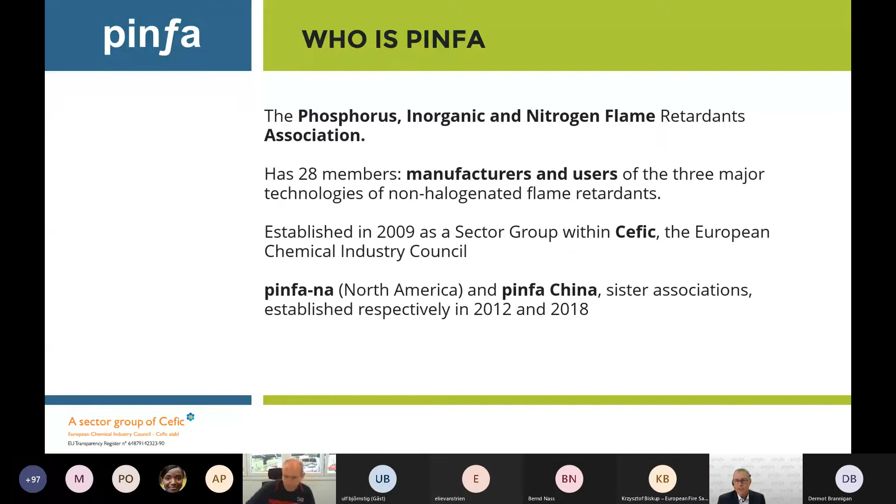Going to the next page, who is PINFA? As I said, the Phosphorus, Inorganic and Nitrogen Flame Retardants Association was established in 2009 as a sector group of CEFIC, the European Chemical Industry Council. And we also have sister associations in North America and China set up in the meantime. And on the next page, just a quick snapshot of our membership. So you'll see big familiar names from the chemical industry, but also smaller specialized companies. And PINFA brings together not only producers of flame retardants, but also downstream users of flame retardants, because we want to collaborate along the value chain.

Going to the next slide, just also a quick view on our leadership team within PINFA. So there is Esther and Hanan, based at Cefic in Brussels, who take care of our daily operations. And I have two vice chairmen, Michael Klimes and Thomas Futterer.

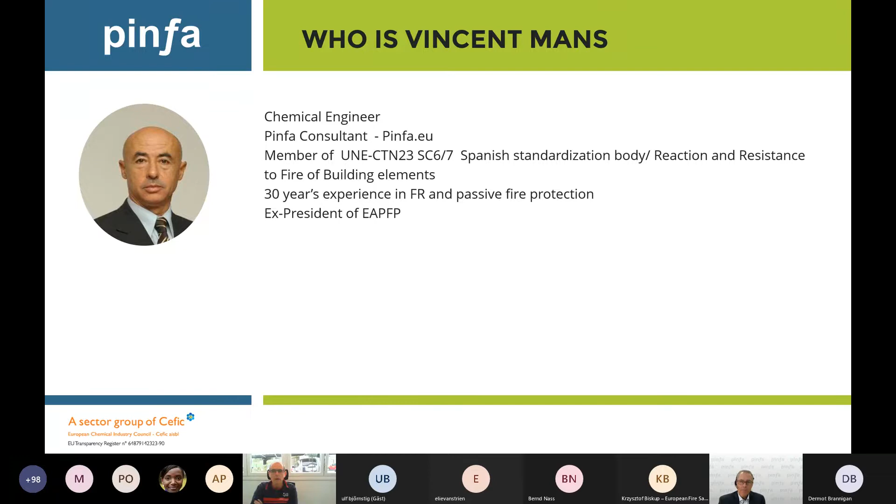And then we have Laurent Tribu, a polymer expert who works at Schneider, but has also a history working for other companies like Nexans, experience in wire and cables, a lot of experience in flame retardant formulations, also work in standardization bodies like IEC, and he's also a member of our pinfa advisory board. And then further, Dieter Brands, a colleague from the fire services. He graduated from the University of Leuven and now works with the fire brigade and is very active in fire safety activities in Belgium. And he will be speaking later to us from the fire station. So looking very much forward to that.

And then we have Lars Derek Mellet from Switzerland joining us. He works for a consulting company, Walter Progress AG, and is an expert in tunnel fire safety. So applied research projects on road tunnel safety and operational safety equipment in these tunnels, and we'll hear from him later on the specific issues that these tunnels pose for safety involving electric vehicles. Yes, with that we come to the first presentation, and that will be Paul, and he'll speak about fire risks of road vehicles and how these risks are changing with vehicle safety.

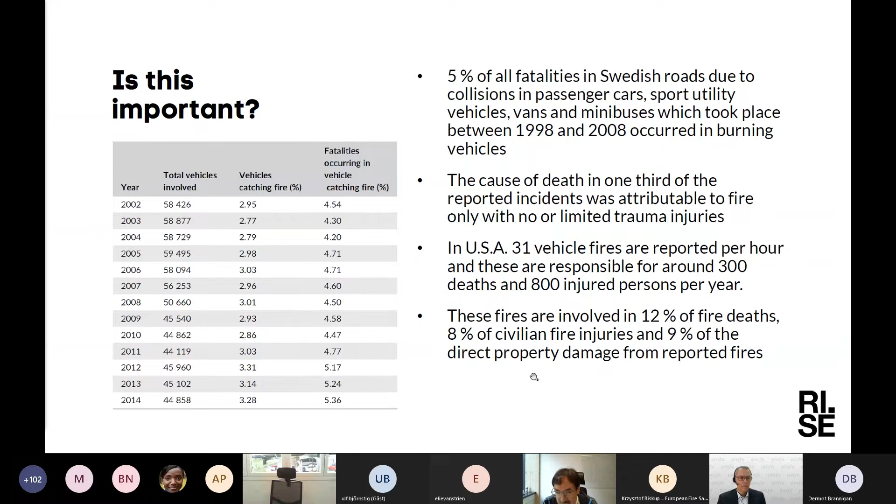On the other hand, if we consider the third column, the vehicles catching fire increased from 2.95% to 3.28%. Well, it's just 0.5%, right? It doesn't seem to be a lot. But if we consider the casualties in traffic and take the last column, we see that fatalities occurring in vehicles catching fire go from 4.54% to 5.36% in this 12-year period. That means the amount of persons who die due to fire is increasing. So if you please take the next slide.

Then if we take a look at the primary factor involved in ignition and fire rate, according to the age of vehicles, we see that modern vehicles have a slight increase in catching fire, at least going to 2014. That means not all the vehicles, but the modern vehicles have a slight increase from 2.5% to 3.5%. If we talk about the primary factor involved in ignition,

Oh, there is some microphone here. But yeah. Can everybody please mute? I'm gonna mute all, and Paul, if you can unmute yourself to take care of this issue. Okay, I'm gonna hit mute all. Okay, so Paul, if you can unmute yourself now, then we can continue.

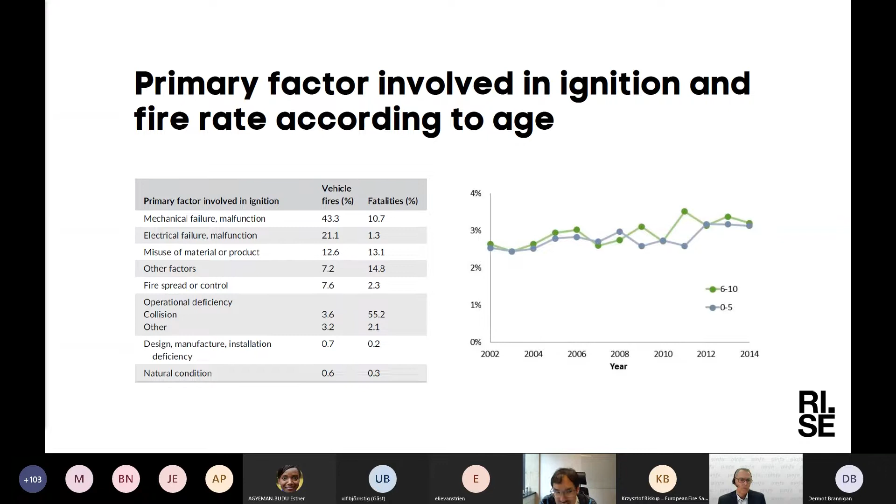I'm talking just about fires in vehicles due to a collision in this part, and we're now showing the initial point of impact and origin of minor and major fire. There is a chart on your left-hand side which shows that the most representative, overrepresented type of collision is a frontal collision.

And on the right-hand side, there is a chart which shows the occurrence and origin, and the two right columns are unweighted and weighted. Because we take the statistics, and when we weight them, that means how many fires they correspond to in statistics for the United States. And we see that most of the fires indeed commence in the engine compartment as a minor occurrence. As a major occurrence, it's the same. And you continue to the next one, please.

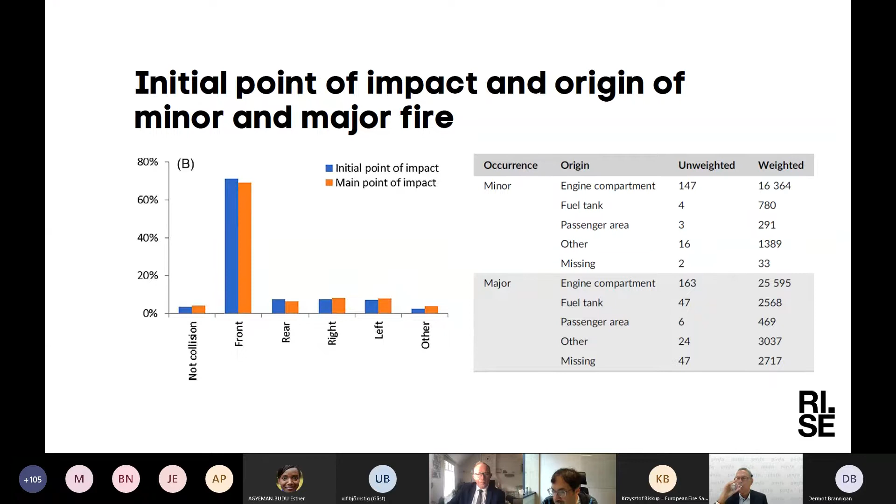And then we take the area of origin and cause of fire, and that's probably the most important part: how you translate the statistics I just showed you. The engine area, the running gear, and the wheel area are probably the most important for major vehicle incidents in transport. But we also consider fatalities, in red or orange, whichever color you see. It's also overrepresented: almost 80% of major vehicle incidents commence in the engine area, and almost 40% of the fatalities occur due to fires that originate in the engine area.

If we look at the right-hand side chart, which is similar but about the cause of fire, the cause is operational deficiency or collision. That's where most of the fatalities are, but not most of the fires. That means operational deficiency or collision leads to the major amount of fatalities, even though it's not overrepresented, because mechanical failure and malfunction is the one behind most major vehicle incident fires. But for fatalities, collision is the one that leads to the most deaths attributable to fire. Could you show the next, please?

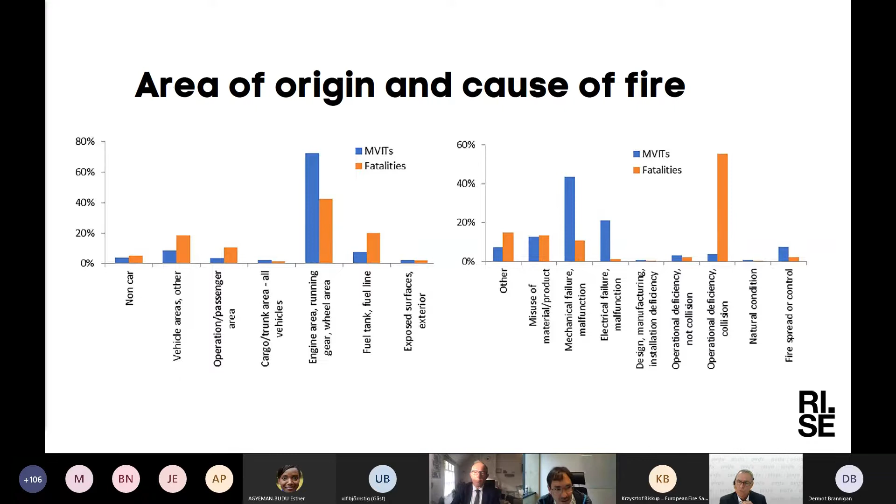If we consider the amount of energy dissipated in each crash, and the fatalities that result, it's not surprising that increasing the energy of a collision will lead to a higher probability of catching a fire.

When we arrive at more than 2,000 kilojoules, that's a massive amount of energy dissipating in a crash. Most crashes, about 3%, are in this region, about 2 megajoules. But when we arrive at 4 megajoules, the probability of catching a fire and dying in a collision is massive.

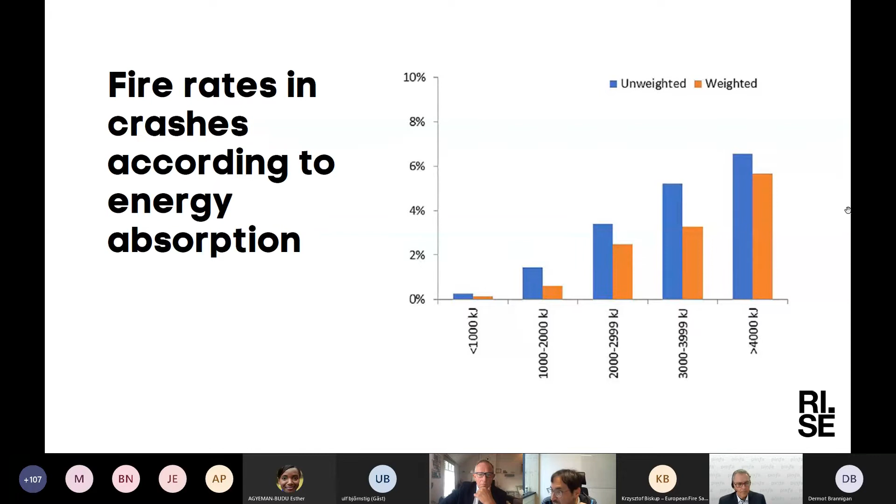The sad part is that we have improved the survivability of crashing in vehicles a lot, but the probability of catching a fire is larger. That means we have a better probability of surviving a crash due to traumatic injuries, but a lower probability of surviving due to the vehicle catching fire.

Next one, please. What happens when we compare, without a crash comparison, internal combustion engines with electrical vehicles? We did some measurements and some studies in the literature.

On the left side there is a chart measuring carbon dioxide, carbon monoxide, hydrocarbons, nitrogen monoxide, nitrogen dioxide, hydrofluoric acid, and cyanides. We compare just the amount for electrical vehicles and internal combustion engines.

We see that, above all, hydrogen fluoride and chloride production is much higher for electrical vehicles than for internal combustion engine vehicles. This is, of course, not surprising since we have been expecting it.

Then there is a chart comparing the energy of the battery against the hydrogen fluoride that is produced. As you can see, the larger the battery, the larger the amount of hydrogen fluoride produced.

There are tests being produced in ETOX, which is our project from RISE, and also from INERIS, on vehicle tests on the battery, which is a larger scale test. Now my last slide, if you would like further information.

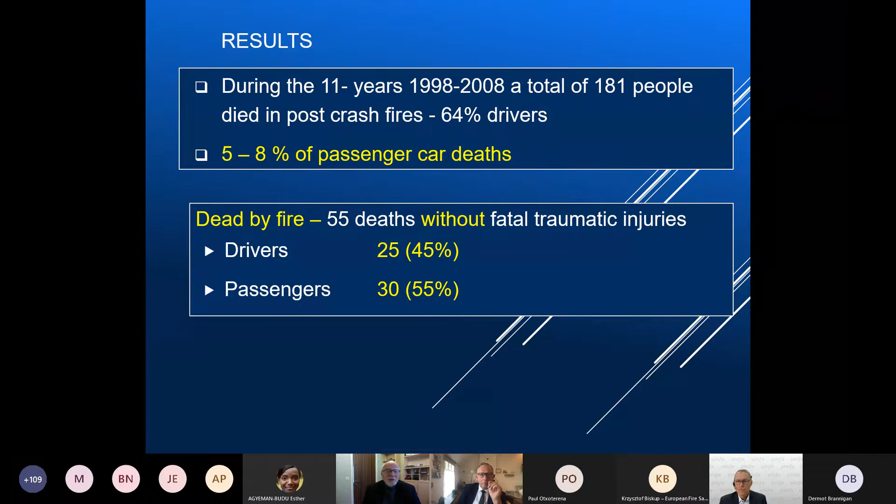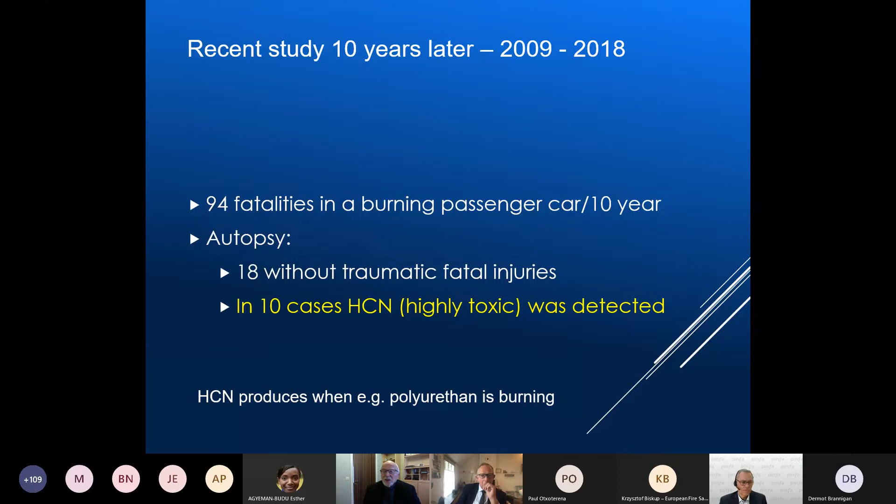Next slide. We have recently repeated this study. It's interesting that forensic pathologists have identified hydrogen cyanide in at least 10 victims of the 18 who died because of the fire. I will talk more about this substance later.

Next, please. Does e-vehicles cause new problems with respect to gas emissions? Paul pointed out one substance. Maybe it will be so. We'll wait and see.

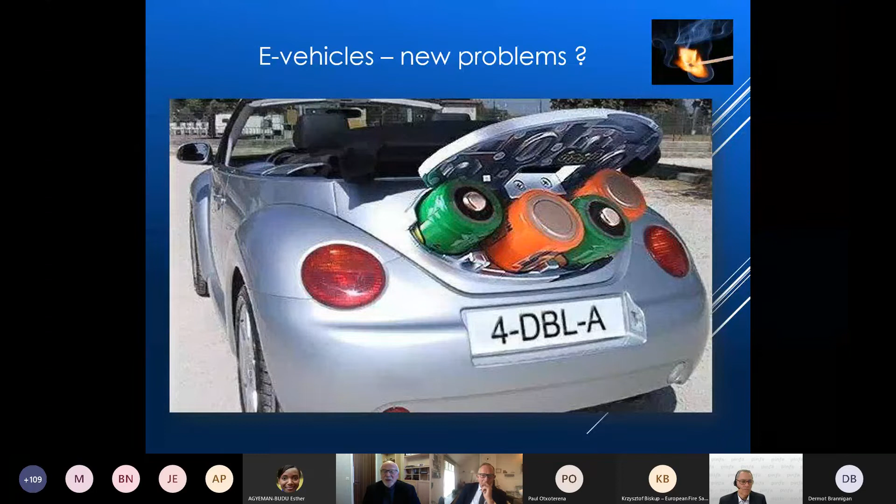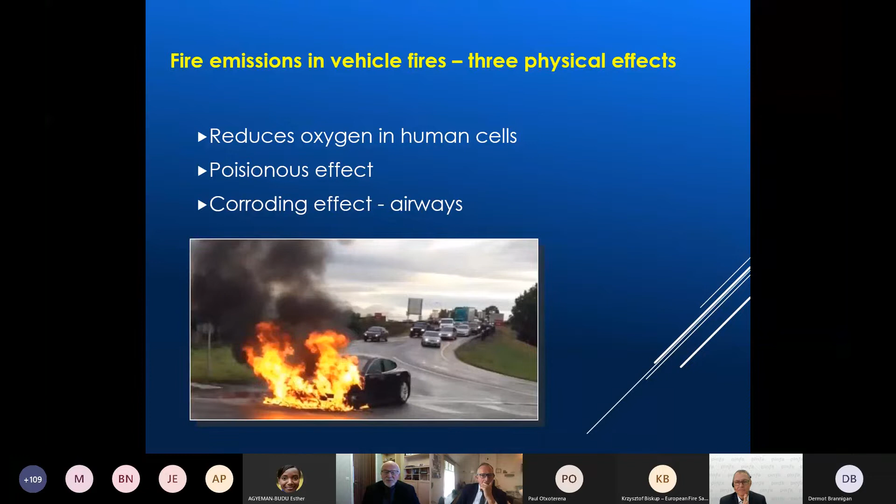Next picture, yeah. The smoke may have three main effects, as you see on this slide. Next slide.

First, we have the oxygenation problem. Three factors that are additive and contribute to compromising the oxygenation of cells are: first, lack of oxygen in the air. If the level is below 10%, it is too low. This may happen in a closed space, for example in a ferry or an underground garage, when the fire has consumed the oxygen from the air.

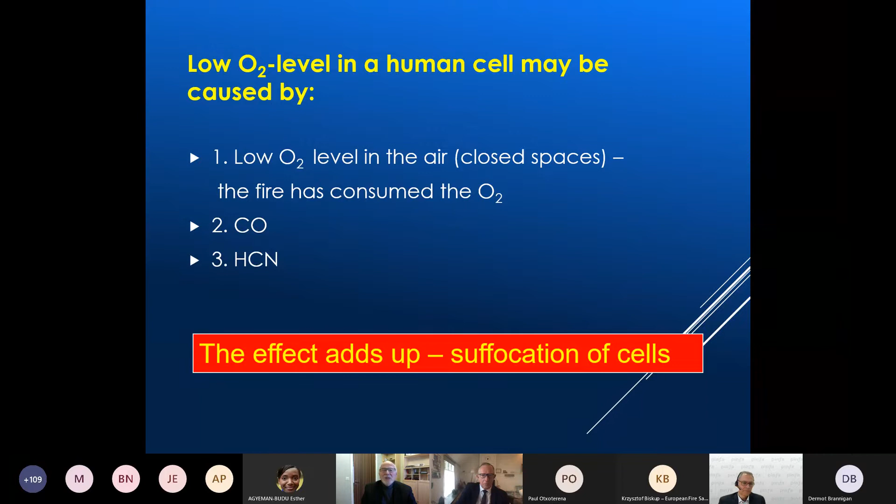The second factor is carbon monoxide, and the third is hydrogen cyanide, both with very important effects, but possible to handle. Carbon monoxide attaches 250 times easier than oxygen to the hemoglobin in red blood cells, thus blocking the uptake of oxygen. High levels of carbon monoxide cause death, but quick and competent treatment may save some victims.

A pitfall is the fresh red color of carbon monoxide hemoglobin in intoxicated victims, which could be misinterpreted.

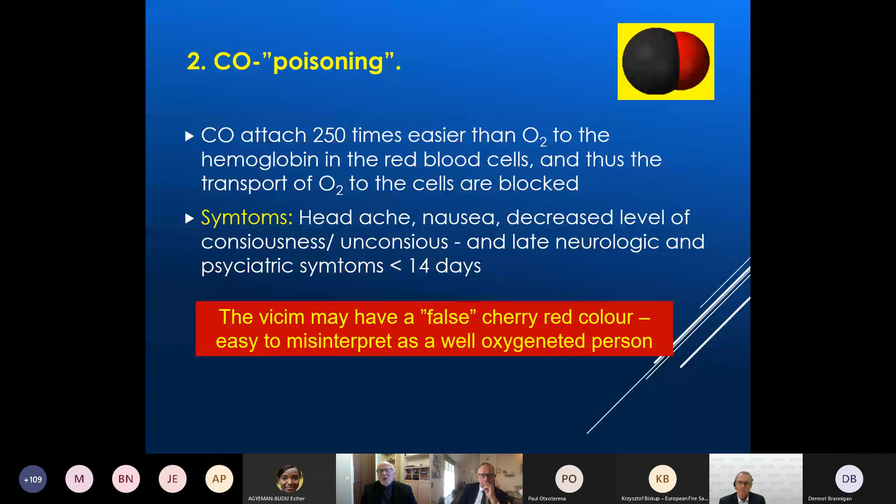The third oxygen-compromising factor is cyanide, which is a highly toxic gas causing death quickly in low concentrations. The cyanide ion goes easily from the bloodstream into the cell, and in the cell it shuts off the energy production. Consequently, the cell cannot absorb any oxygen from the bloodstream.

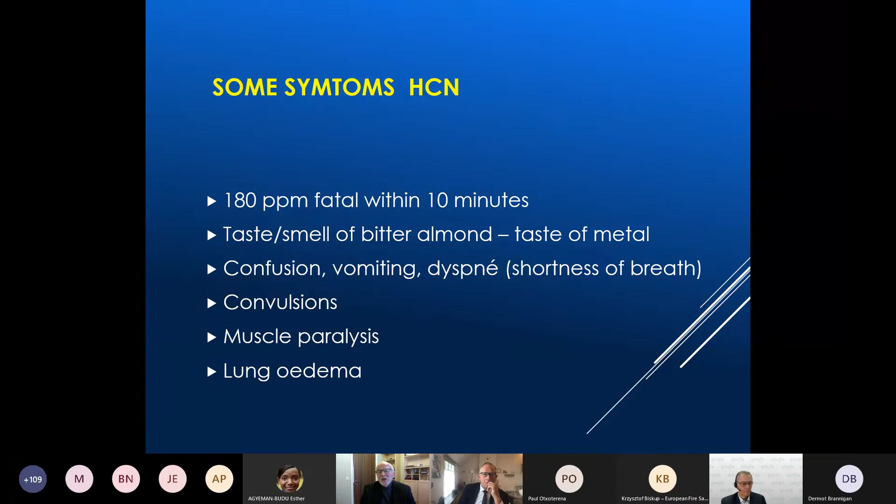Cyanide smells of bitter almond, causes confusion, convulsions, and finally death.

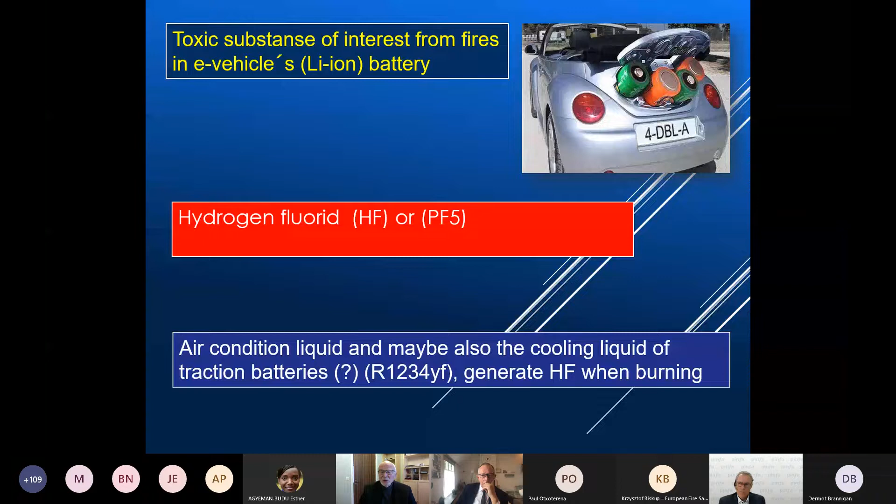Does a vehicle add more to these problems? Yes, maybe. A burning traction battery often produces hydrogen fluoride, HF. However, HF may also be produced by, for example, air-conditioning liquid burning in other cars. I don't know, but a recent rumor indicates that eventually the same liquid may be used in e-vehicles' traction battery cooling system. I do not know, but if this is true, it would be bad.

HF has two major physical effects. The first is a corrosive effect causing swelling and bleeding in the airways that may cause severe respiration problems.

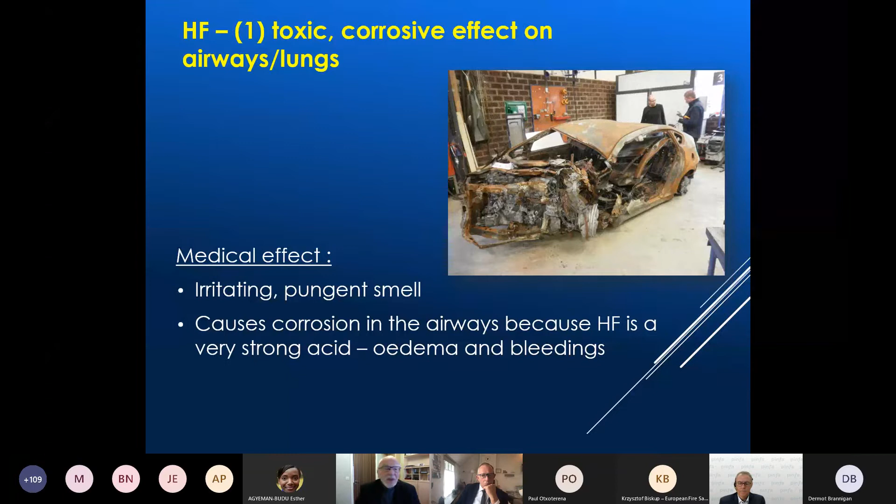The second effect is changes in the electrolyte balance in blood, of which a low calcium level may cause heart arrhythmias, and a high potassium level will cause severe muscular pain.

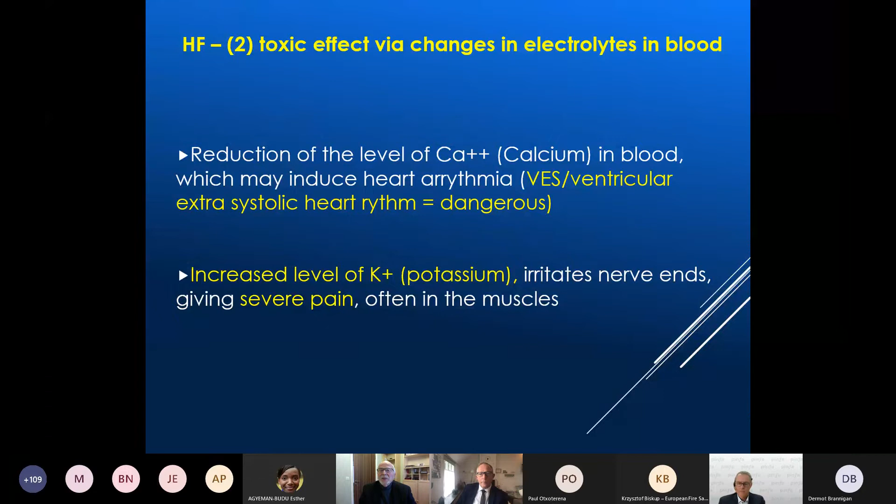So how to treat the victim? First, always oxygen, preferably 100% under overpressure if possible. Second, if edema and swelling in the airways, put an endotracheal tube into the upper airway to secure breathing. Third, asthma drugs against bronchus narrowing, plus cortisone drug against swelling.

The fourth point is, if the victim has impaired consciousness, give an antidote against cyanide, in this case Cyanokit, a fantastic safe drug, reversing the block of energy-producing mitochondria in the cell. However, the drug is a little expensive, so not all ambulance organizations use it.

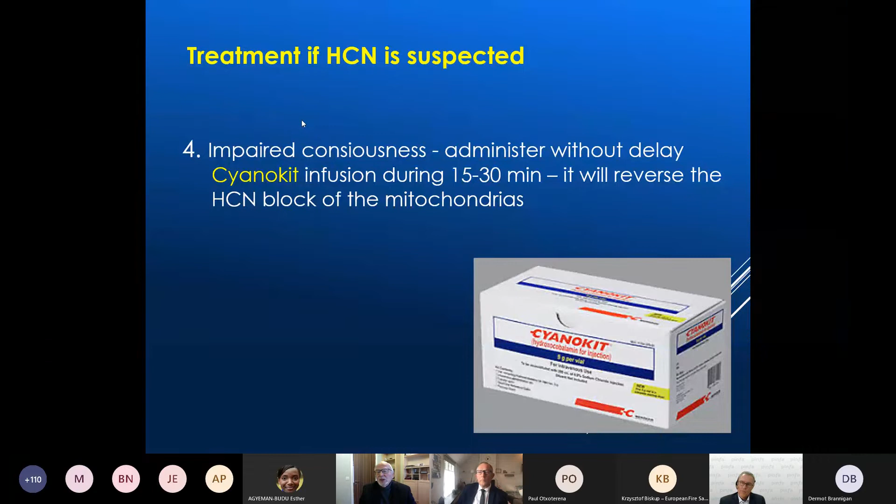How to handle HF-impaired victims: if heart arrhythmia, they need calcium. If the victim is conscious, it's possible to give calcium tablets via the mouth. These victims may quickly deteriorate, so they should be taken to hospital, and in severe cases, they may need intensive care or a pressure chamber if available.

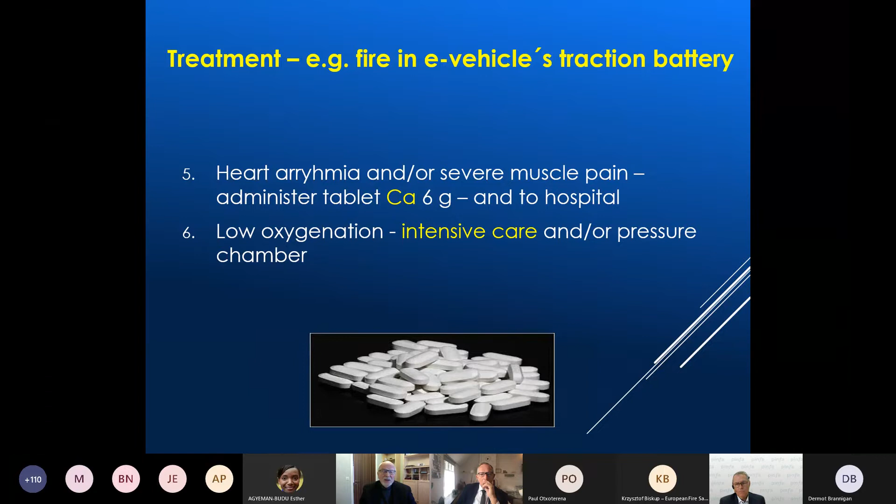Thank you from two hopefully fluoride-free veterans.

That was the end. Thanks very much, Ulf. Thank you, and a nice car by the way. Yeah, 50 years, very nice. No fluoride in that car.

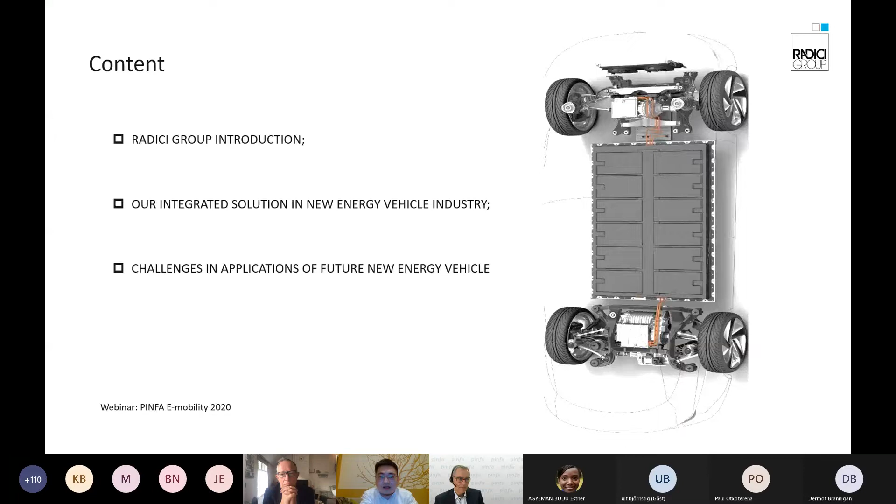So here's the content of my presentation. I'm going to briefly introduce you to the Radici Group and our integrated solutions in new energy vehicles, and also the challenges that we are facing currently and in the future.

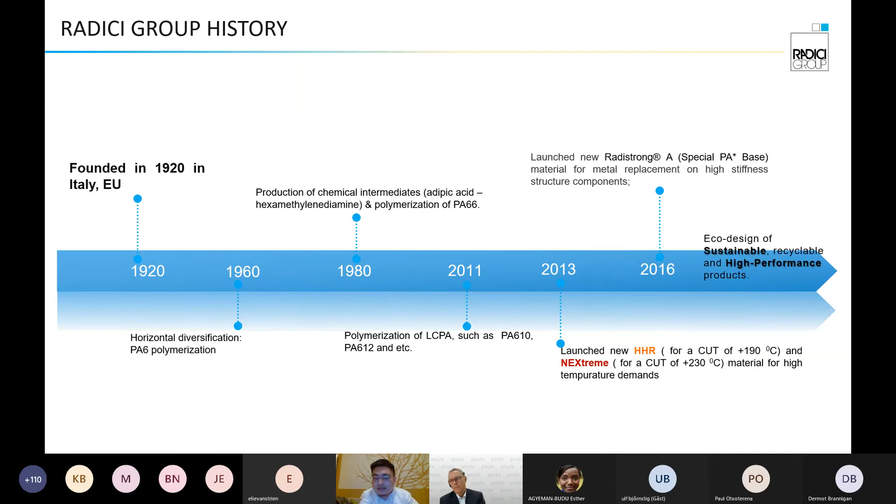Here's the history of the Radici Group. The group was founded in 1920. In 1960 and 1980, we started our own implementation of both PA6 and PA66. In 2011, we started the implementation of long-chain polyamide, including PA610 and PA612. In 2013, we launched new high temperature nylon which can survive temperatures up to 190 degrees Celsius, and also 230 degrees Celsius for integrated engine components. In 2016, we launched new high stiffness polyamide, targeting the battery pack segment with this new high stiffness polyamide.

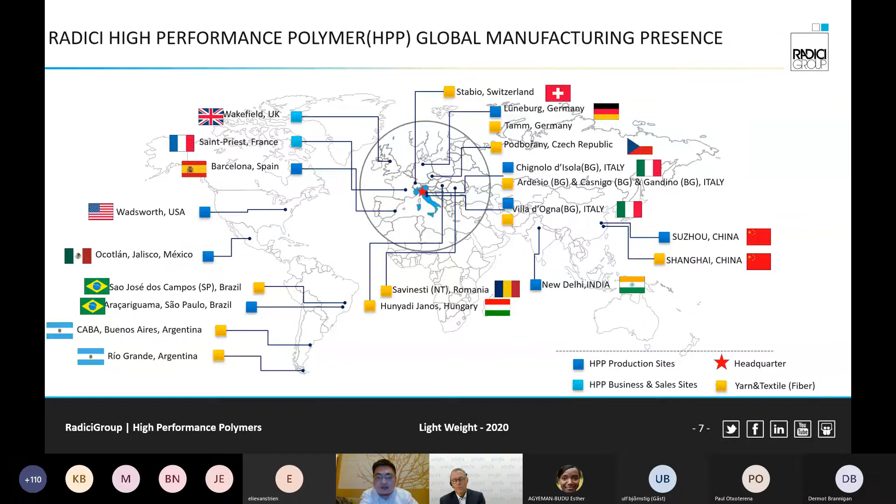Here's our global site. We are a global corporation supporting all the areas our customers need.

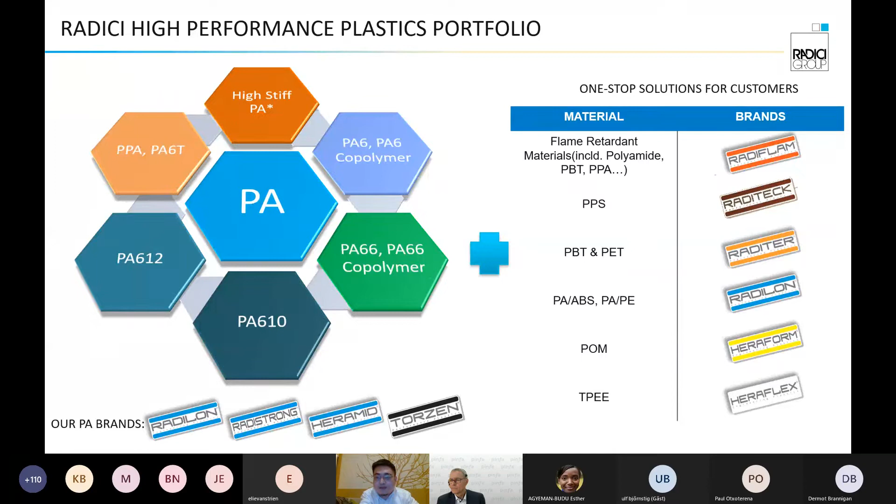Here's our product portfolio. Basically, we are polyamide upstream integrated solution suppliers, and besides that, we also provide customers with one-stop solutions, including other materials like PPS, PBT, POM, and others.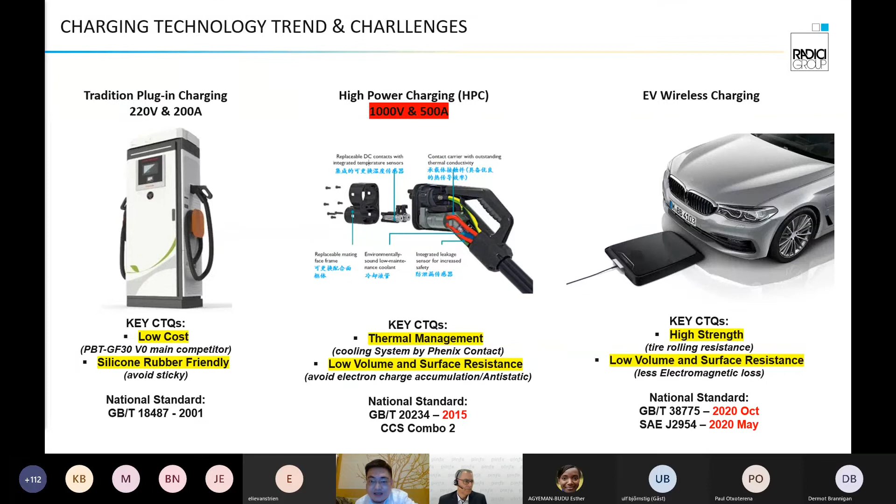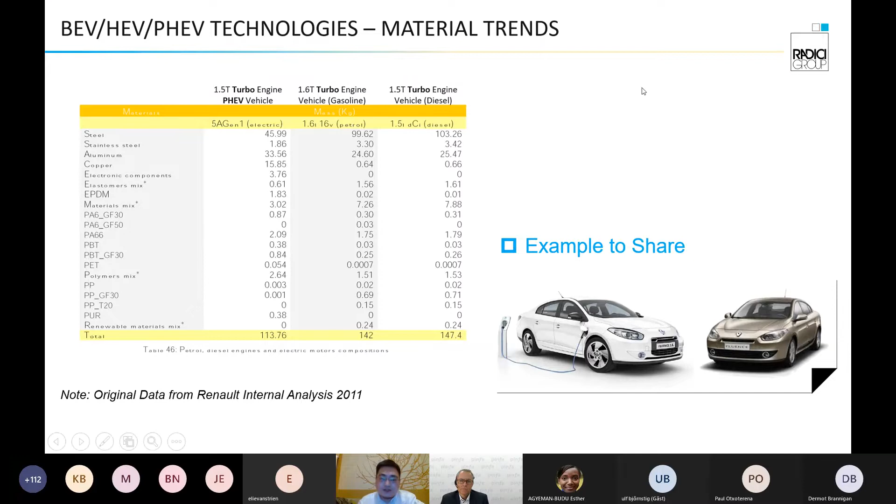Here is the co-work we had with Renault back in 2011. As you can see, here is the material BOM for only the powertrain systems. A very interesting thing is that for the hybrid vehicles, which is the 1.5 turbo engine PHEV vehicles, there's a very interesting material trend for the PA6s and also PBT. The usage for the new energy vehicles has almost tripled compared with the traditional ICE engines like the 1.5T turbo diesel engine and also the 1.6 turbo gasoline engines. So this is a very interesting trend. Next, thank you.

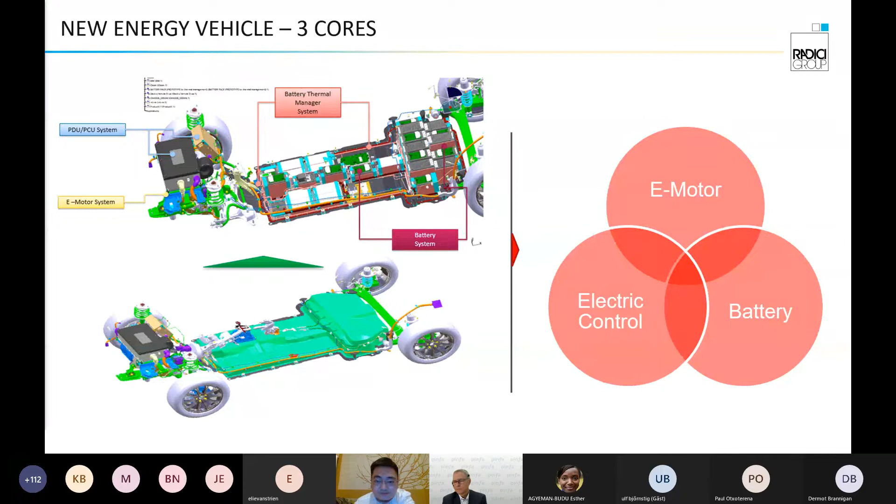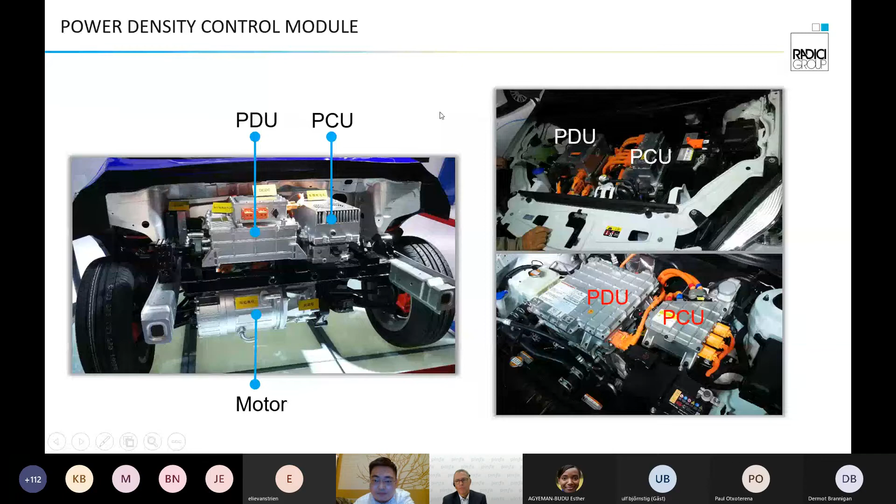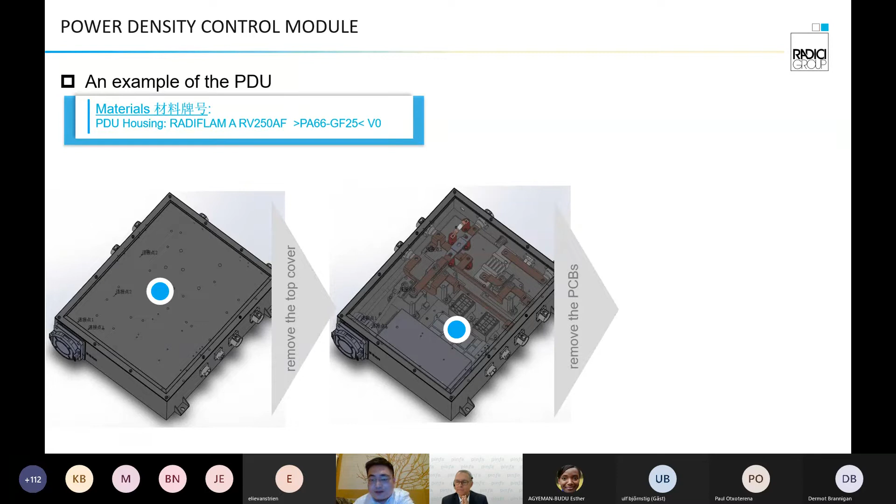Okay, so as everyone knows, for the new energy vehicles there are three core technologies: e-motor, battery, and electrical controls. And I'm going to show you several typical applications. Next, please. Here you can see the e-control systems, including the PDU, power distribution unit, and PCU, power control unit. Those are metal, but if you open them up, you can see a lot of plastic components within them. Next, please. Yes, so now you can see the PDU if you open it up. Next, and next. Okay, so you can see a lot of plastic parts within these PDU housings, or you can call it junction box. Next.

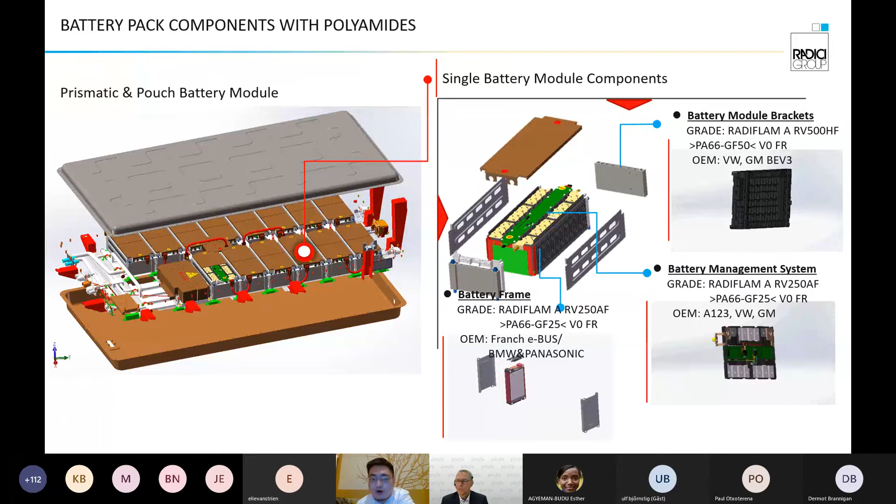Yes, and next. Okay, so you can see here there are a lot of parts for the junction box and also for the battery pack. For battery modules, we have several grades for the battery module brackets, using PA66 filled with 50% glass fiber, V0 grade, and for the battery management systems, also PA66 V0 grade, and the battery frame, PA66 filled with 25% glass fiber V0 grade. But for all of these components, we should be very careful with the contact corrosion issues and also the volume resistivity drops, which can cause electrical breakdown, which will finally cause fire in the field. Okay, thank you.

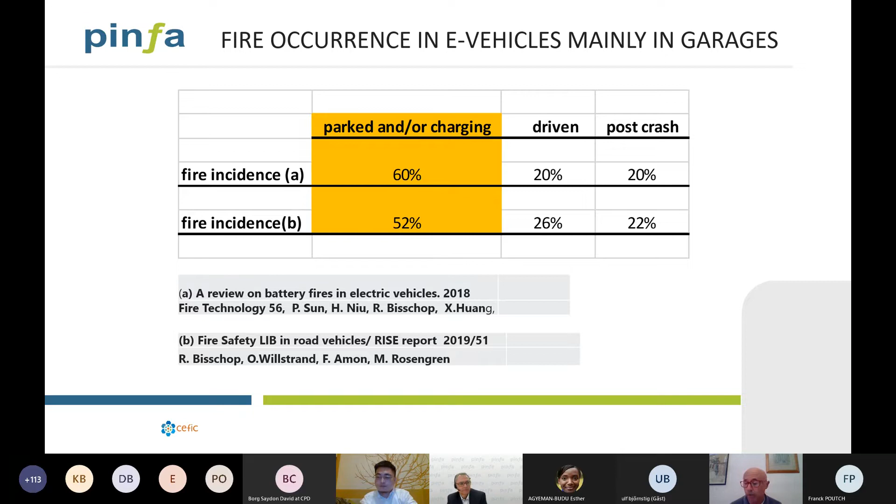If we have a look at fire occurrence in electric vehicles, recent studies in 2018 and 2019 showed that about 50% of the fires in electric vehicles happen in cars when they were parked or being charged. Next, please. If we look at what will happen in future, we have plenty of big garages with long and wide batteries of chargers, and this really represents a risk in a closed space. Next.

If we review a little bit the actual regulation intended for ICE vehicles, so internal combustion engines, normal vehicles, which is a regulation up to member states right now in the European Union, but framed within the European construction codes, the so-called Eurocodes, basically it requires for garages above 100 square meters, which could correspond to a domestic garage,

90 to 120 minutes resistance to fire. This means that fire doors, columns, beams, partition walls, penetration gaps, etc., have to resist for between 90 and 120 minutes. And for robotic parking, the requirements are much higher, from 120 to 180 minutes resistance to fire.

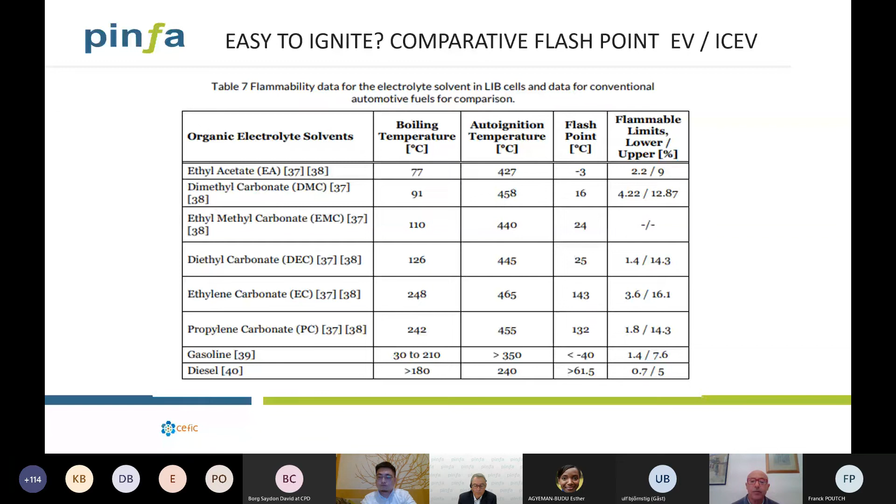Next, please. All right. Sorry, the former one, not yet finished.

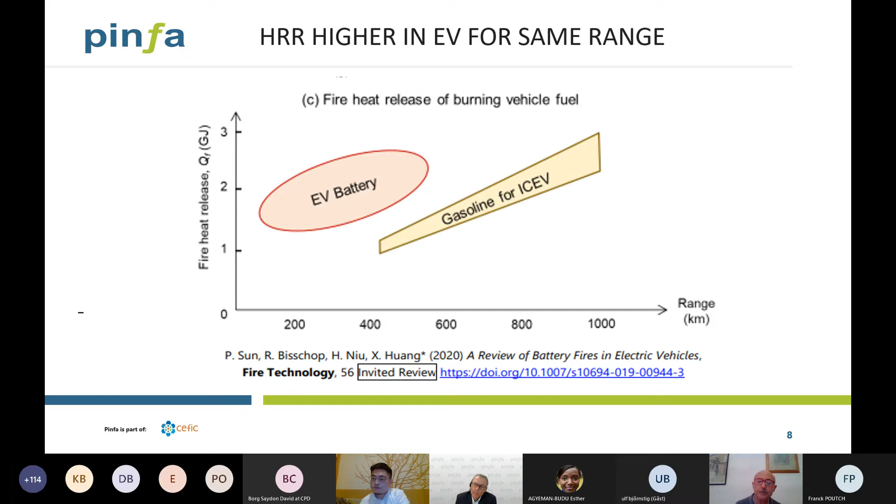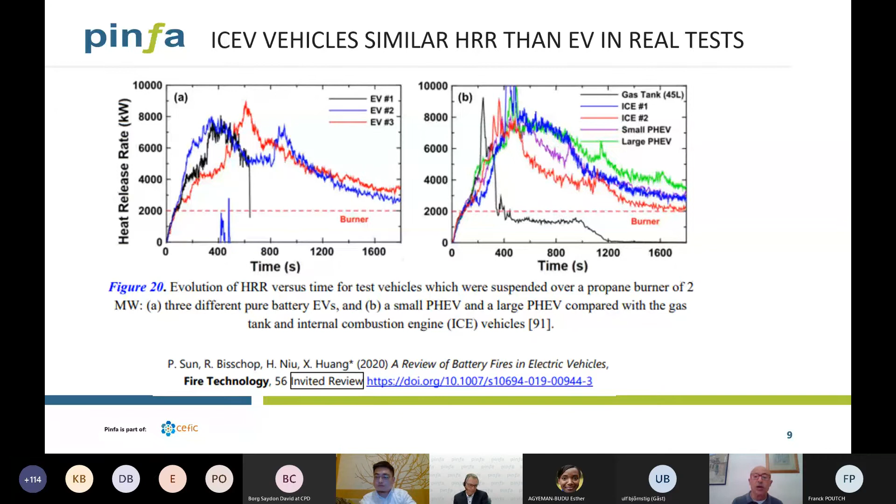This is a real test on the energy heat release and heat release rate, and we can see the evolution is quite similar in this comparison between electric cars and some combustion cars, here on the right side. Next.

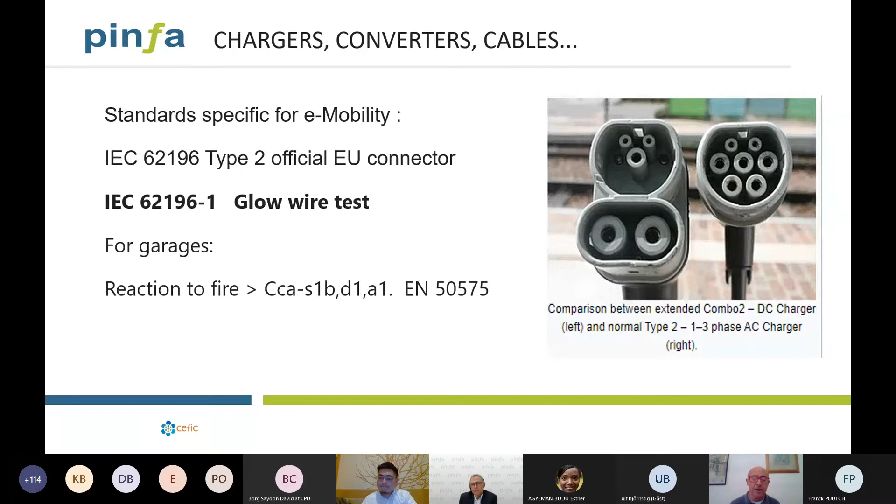There are many other things around electric vehicles, as discussed before, like chargers, converters, etc. Specifically, there is a recommended, I'm not sure if fully regulated, standard for the Type 2 official European connector. Among more than 20 parameters within this standard, only one concerns fire, the well-known glow wire test. And regarding garages, the same classification I mentioned before, used in the construction codes, is repeated. Next.

Ventilation, that's an important issue, as said before. And the actual regulation really only looks for opacity. So they try to reduce the opacity in order to allow evacuation and allow to operate to extinguish the fires. But there is no consideration on the toxicity of the fumes, and with e-mobility we are expecting much more toxic smoke. Next.

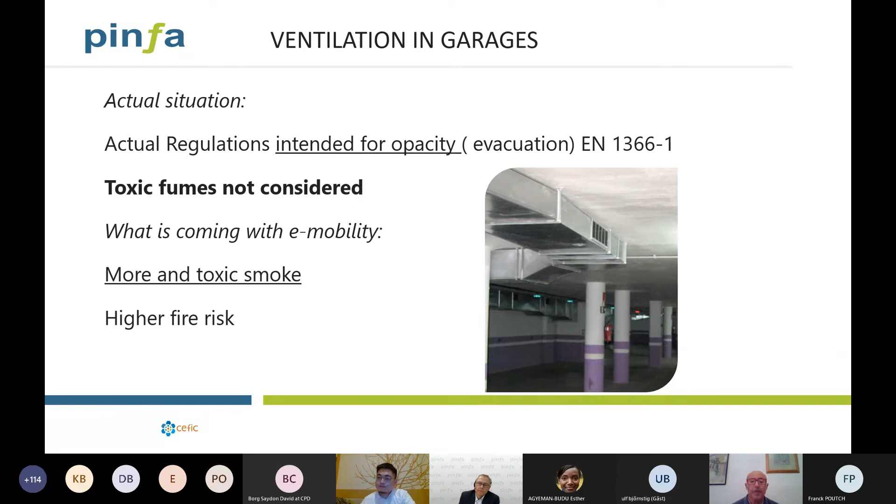For example, the hydrofluoric acid, as already mentioned before, is one of the key emissions in these cars. So when we compare the diesel car with an electric car, the quantity of hydrogen fluoride is almost double. Next.

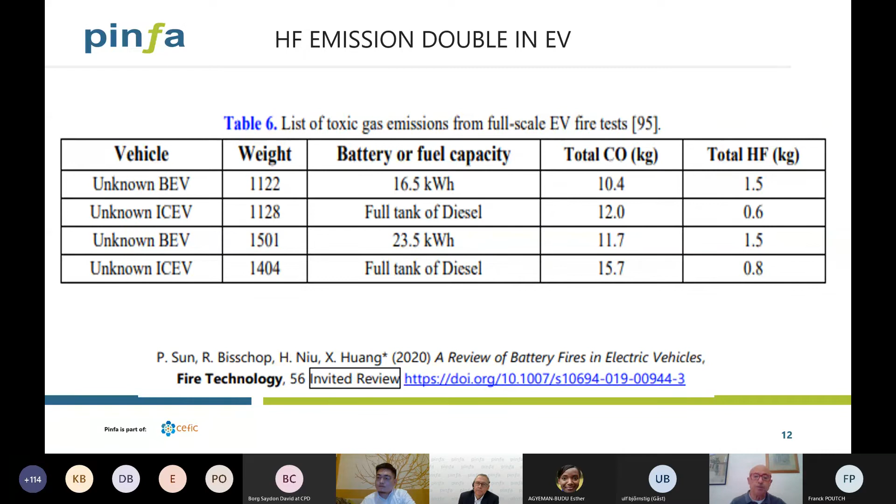Light materials in electric vehicles: obviously the tendency is to have lightweight, either for normal vehicles and as well for electric vehicles, even with more intensity. Those materials have been discussed before with David Key. But there are other pieces like the front, the back, etc., around the cars, which tend to be more plastic.

And here I just would like to outline that many of them are reinforced materials, either glass or carbon reinforced materials, which under a fire event release toxic fumes, but not only toxic fumes, but fibers, and especially nanoparticles in fibers, which are really dangerous. Next.

So to conclude, even in those closed areas like garages, it is the worst and most probable fire scenario, and resistance and reaction to fire of all these elements is quite well regulated, as we have seen before. However, there is a certain need, because we have slightly higher fire load with electric vehicles. Such a higher fire load may suggest future revisions of the standards and regulations on reaction and resistance to fire in garages. The smoke emission is the issue.

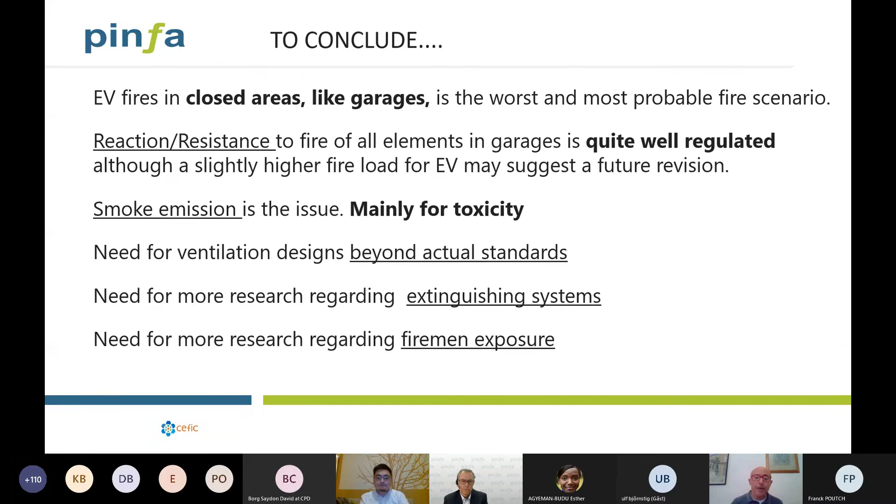And at the end, the need of more research regarding firefighter exposure, because at the end of the day, they are those who are in front of the fire and need to operate in safe conditions. So with that to conclude, that's the end.

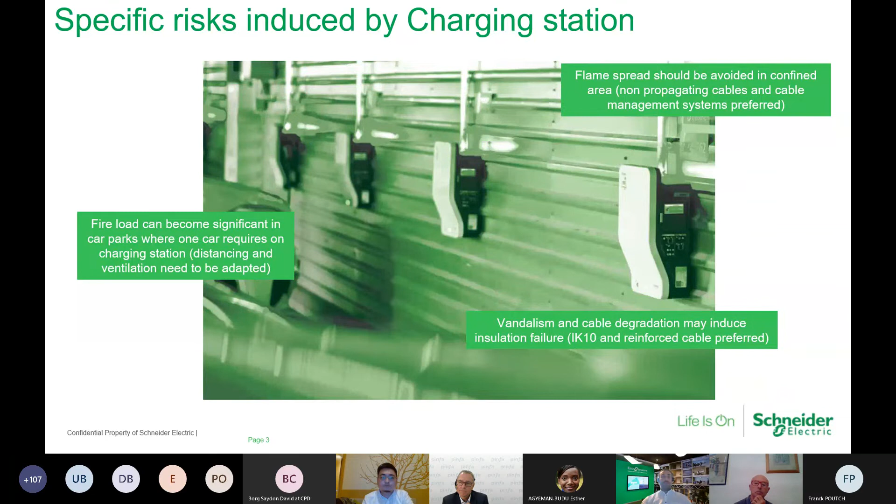So next slide, please. So as you probably know, 4 different charging modes are standardized in countries covered by the IEC standard. It's just 3 charging modes in US. The first mode is less powerful as it is limited to 3.7 kilowatts, but it is also the most risky because no specific protection is added to your domestic installation. The second mode is a little bit safer because it implies a communication and charging monitoring device. In Schneider Electric portfolio, it corresponds to the smart wallbox range.

The third mode is the most powerful in alternative current, and it requires dedicated power sockets and cable in addition to the charging monitoring. And this mode is addressed by Schneider under the parking EV-Link AC range. And the last mode, which is the fast charging, operates in DC, and it's very important because the behavior of plastic material under DC and AC can be significantly different.

It's at very high power, exceeding 22 kilowatts and sometimes even 50 kilowatts. And the main advantage of this mode is the full charging of the battery in less than 2 hours. In comparison with mode 3, it takes a shorter time, and for mode 2 and mode 1, it was almost 8 hours or even a night.

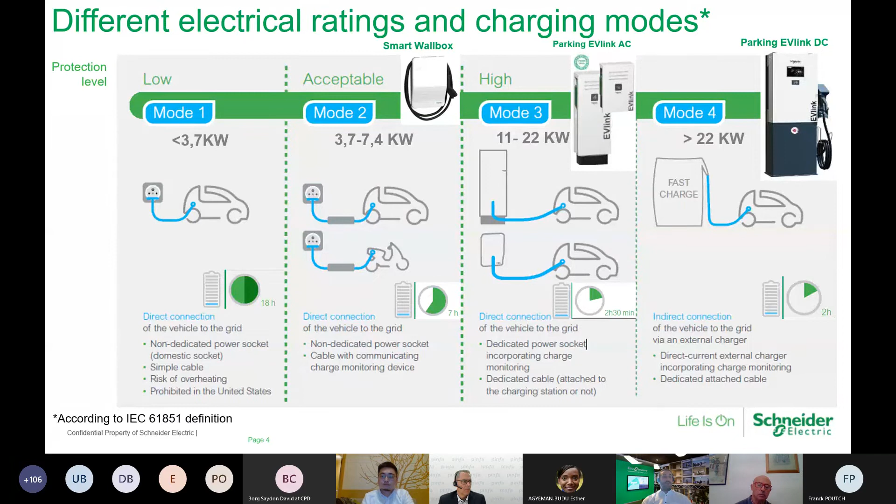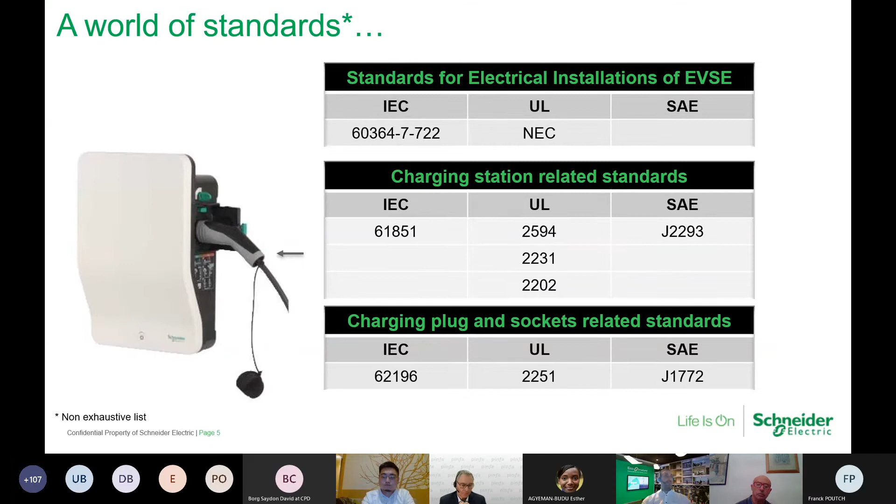Yeah. So as you can see on this slide, the mother standard is dealing with all the installation and not just the charging station. So the short circuit and overload, electrical shocks and overvoltage are specified in this mother standard. Next slide, please.

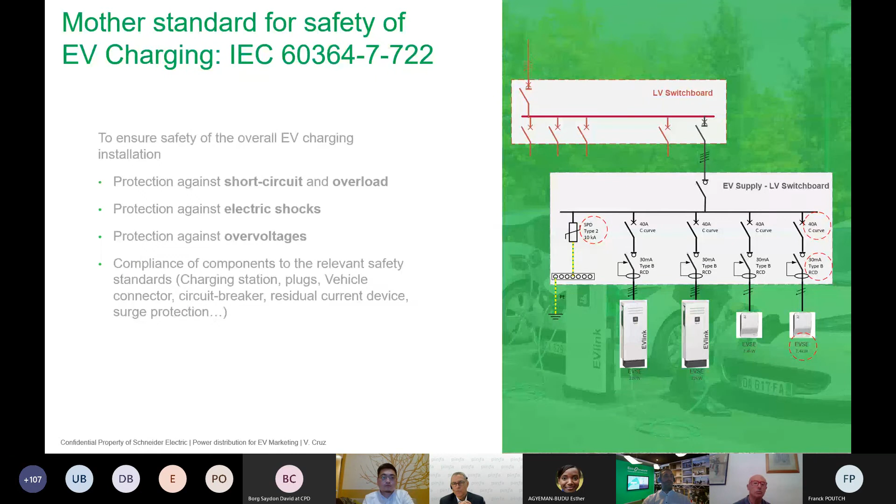Yeah. So if we enter now into the details of the IEC standard and focusing mainly on the flammability and overheating related requirements, we can see that two tests are specified in this standard. The glow wire test for the flammability assessment and the ball pressure for the thermal resistance. The requirements are more stringent for parts in contact with live parts like socket than for the enclosure. So the enclosure should sustain 650 degrees C for the glow wire test, while some components of the plug-in socket should endure 850 degrees C.

Regarding the ball pressure tests, the rating differs also for the part carrying live part and the others. When parts are carrying live parts, they should have a minimum ball pressure temperature of 125 degrees C instead of 80 for the other part. And it can be noticed that an additional test of 1 hour at 110 degrees C is specified for the plug-in sockets to ensure that no visible degradation can happen and no flowing of the sealing compounds appear.

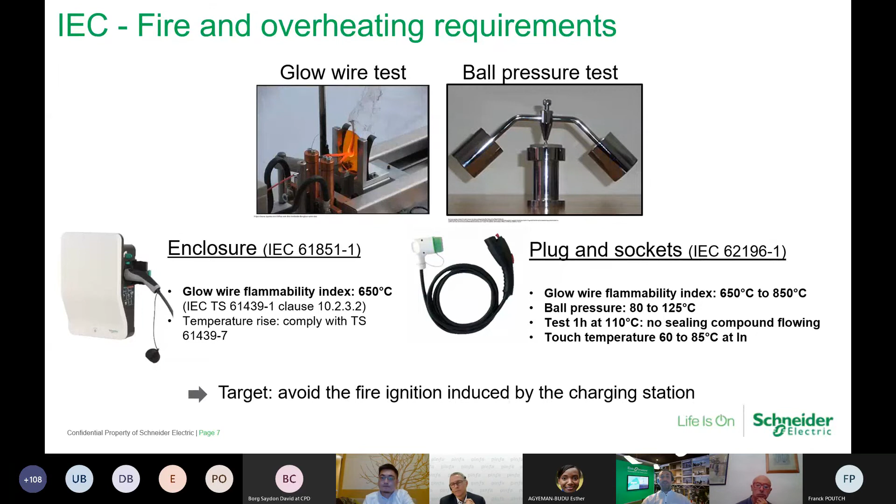So we can see that the target of all these tests is mainly to avoid the ignition of a fire induced by the charging station. Next slide, please.

The situation in US is different, as the flammability test aims at avoiding the fire propagation from internal and external sources. The US standards integrate 3 tests with a real flame of different energy. So the UL94 is requested for both the enclosure and plug-in and coupler, but the enclosure should pass the highest rating of UL94 of 5V classification. So for people who are not familiar with the 5V test, the 5V test consists in the application of a burner 10 times more powerful than the usual burner for V0, V1, and V2 rating.

And moreover, the flame is applied 5 times instead of 2, and the combustion should stop before 60 seconds without flaming droplets. So this rating can be achieved only with flame-retarded polymer, and consequently, the enclosure developed for the IEC compliance cannot be directly used for the US market.

In the UL 2202, an additional test is required if the enclosure exceeds 1.83 meter or 0.93 meter square. This test can be either the Steiner tunnel or the radiant panel, but in both cases, a flame spread rating lower than 200 is specified.

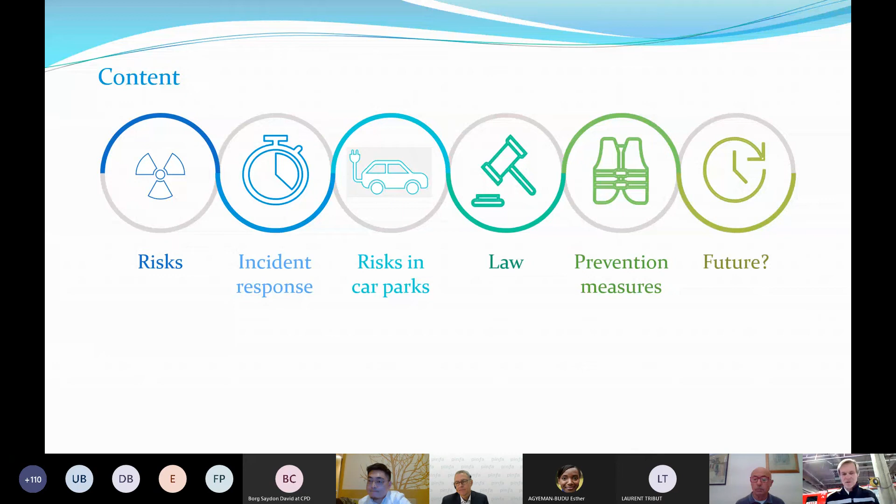So I will talk a little bit about the risks, our incident response, something about the law, the prevention measures, and the future.

So as I already told you, I'm a little bit, and I think a lot of colleagues are a little bit concerned about the energy transition, because of the problems we have to deal with at the moment. We know that companies are driven or obliged by the government to change their fleet to electrical vehicles. And when they use electrical vehicles, they have to install charging devices.

And then they call the fire department and they ask, we want to place charging devices in our underground car park. First question, is that allowed? Second question, are there any precaution measures we have to take? And then mostly it stays very quiet on the other side of the telephone line because we have no rules for this moment.

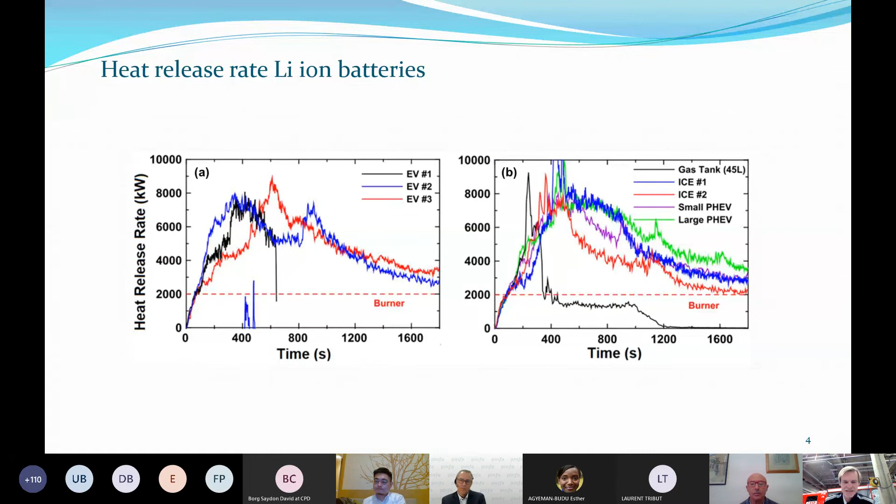The other speakers already told enough about the toxicity of the batteries, the hydrogen fluoride, about the thermal risks, about the high voltage. I already saw this picture presented by the former speaker, but it's a very important one because it shows that the heat release rate between an electrical vehicle and a vehicle with an internal combustion engine is nearly the same. So there is no problem for the firefighters.

When I search a little bit legislation in Belgium, we have no specific rules for the parking of electrical vehicles in underground car parks. We have a nice document that goes about guidelines for car parks, but there we have no measures or specific rules for these electric vehicles.

There is a little bit that will be published in the electric law. We have a new electric law, and there will be some articles published, but it will go about the electrical safety.

And then last but not least, the fire departments. We are used to deal with difficult problems, and we always try to find a solution. So a few weeks ago, we started some working groups here in Belgium with some representatives of the Ministry of Internal Affairs, the industry and the fire departments to think about this problem. And the key question is which extra precaution measures we should take.

Is there any other legislation? I found just one document. It's a document from France that gives some rules if you charge electric vehicles in underground car parks.

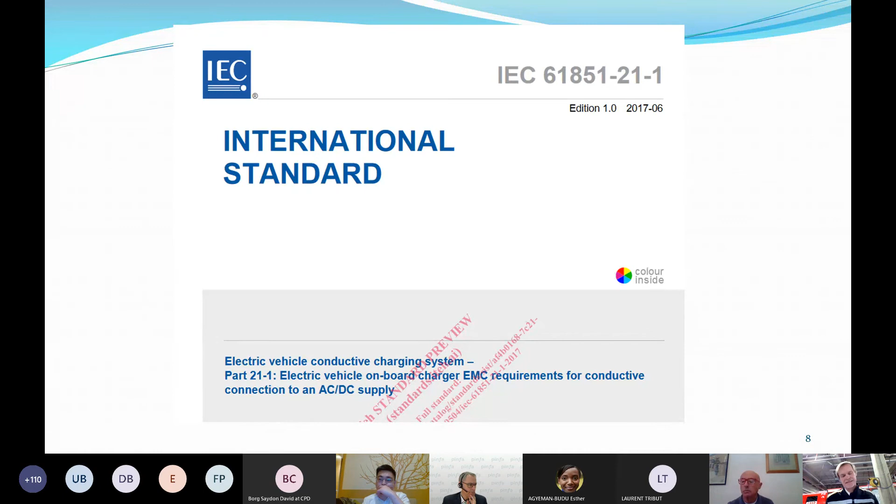I also found an electrical standard, the one the former speaker mentioned, that deals with the charging of the vehicles. And then I also found a very interesting document from our colleagues from the Dutch IFV Institute, where they investigated the fire safety of electrical vehicles in underground car parks.

So what I want to explain to you now is how we will deal with this kind of incident at this moment. You see here a slide of the fire in the Norwegian car park. It was on the 7th of January 2020. And in the beginning, you could read in the papers that the cause of the fire was an electrical vehicle. Afterwards, I read in the paper that it was not caused by an electrical vehicle, but in an Opel Zafira diesel car. But this is how people will see a real fire, and they will call the fire service.

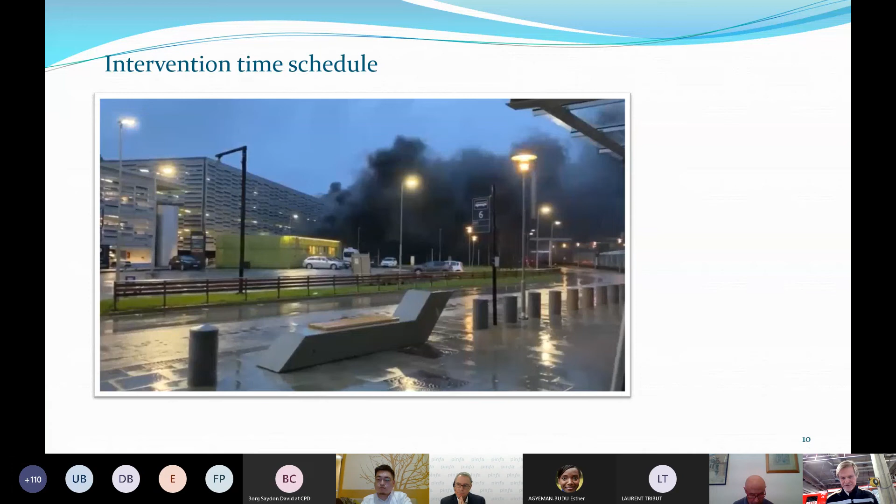And then we would be very happy if there is inside that car park an automatic fire detection system, so that our fire crews come on the scene when the fire development is still manageable, because at this moment they're also placing these electrical vehicles and charging devices in old car parks without any prevention measures. It would also be useful if this automatic fire detection system would cut off the power of the charging systems inside the underground car park.

Oops. Looks like we lost the slides. Yes, sorry everyone, I'm back. I'm gonna share the slide again.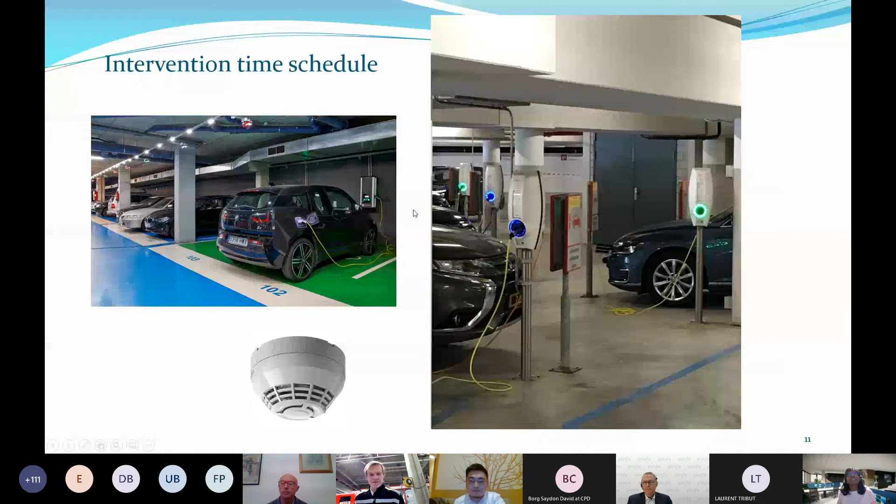Okay, so I already explained it would be nice if this automatic fire detection would cut off the power from the charging system of these electrical vehicles. We arrive at the scene. After a few minutes, we will be at the car park. And then it would be very good if our firemen knew that there are electrical vehicles inside that car park. So it's very important that there is signalization so we know there are electrical vehicles in the car park.

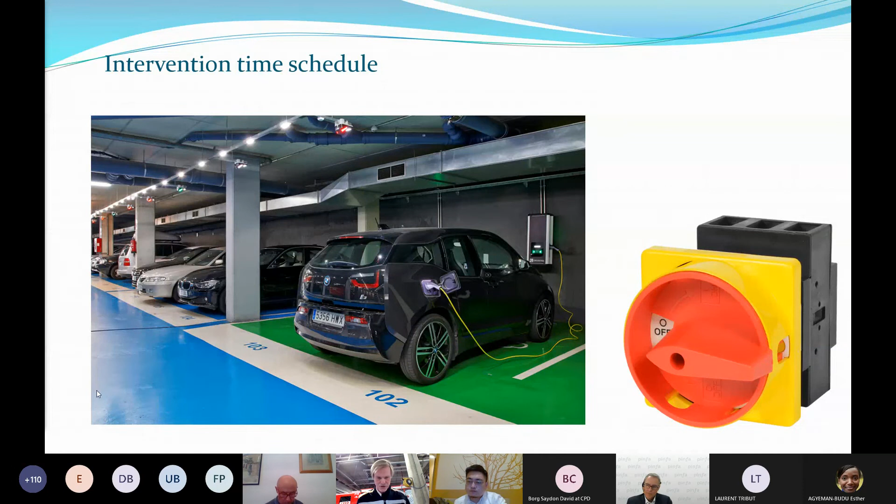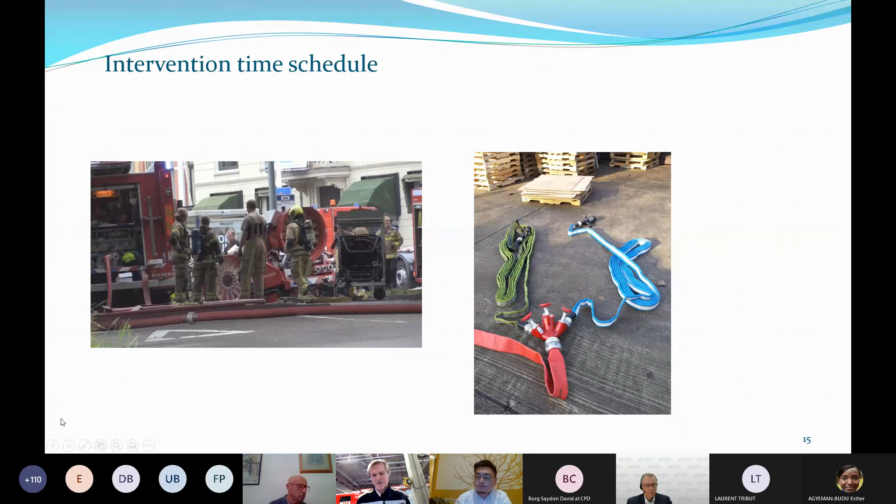And then we prepare ourselves. You see on the right graph two hoses of 45 millimeters, which give us the capacity to extinguish a fire between 10 and 15 megawatt. A car that burns without too much plastic has a power of 5 megawatt. So one or two cars on fire, we can manage this with the equipment you see there on the right graph. And then we enter the car park using the slope.

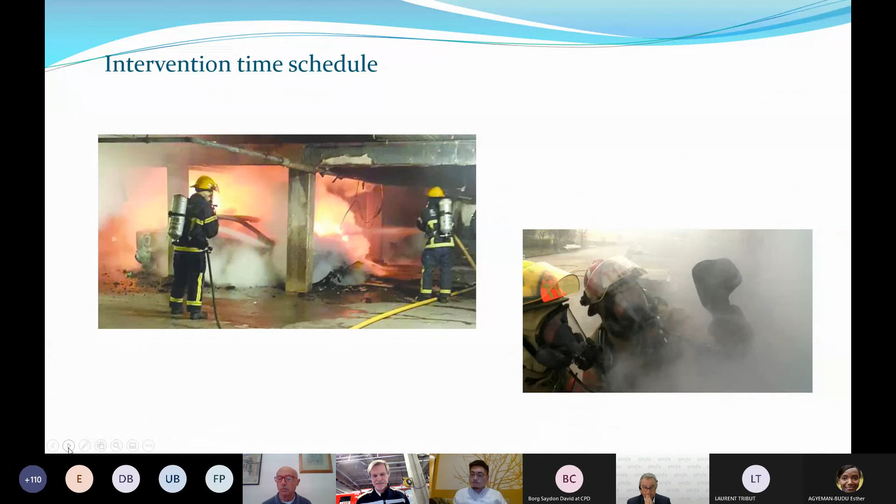And then because there is a lot of smoke inside the car park, because the ceiling height is very low, there is less entrainment in the smoke. The smoke is very hot, very thick, and very black. So we use, as you see on the right graph, our thermal cameras. And then the fire is extinguished. And then we hope that there is a little ventilation opening inside that car park, so that we can use our overpressure ventilators to put out all the toxic smoke.

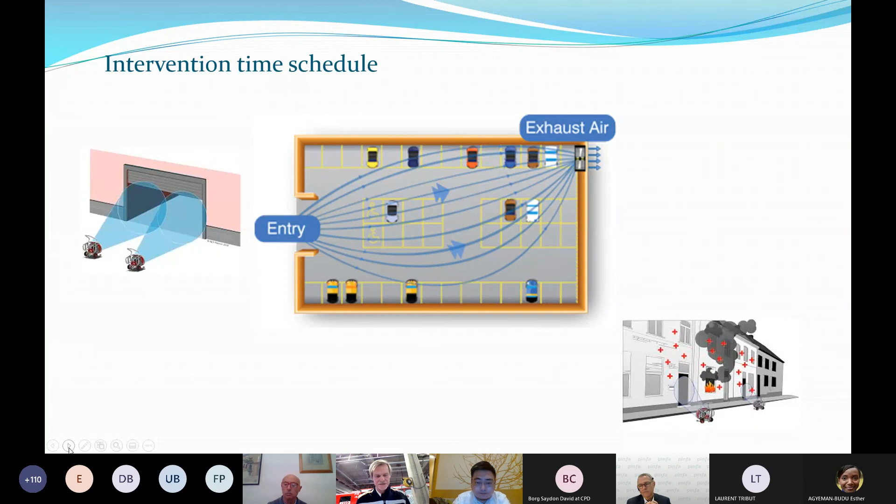Every speaker already talked about the hydrogen fluoride, which is very dangerous for the firefighters. So we should have a little opening to push all these toxic smokes outside the car park.

Next slide. Then we change a little bit our policy in comparison with a normal diesel car, because when we have extinguished a diesel car, it can stay inside the car park. But when it's an electric vehicle, we know already that the battery will reignite.

But again, this is a very big difference with a traditional car. We have to put it always out of the car park. Next slide.

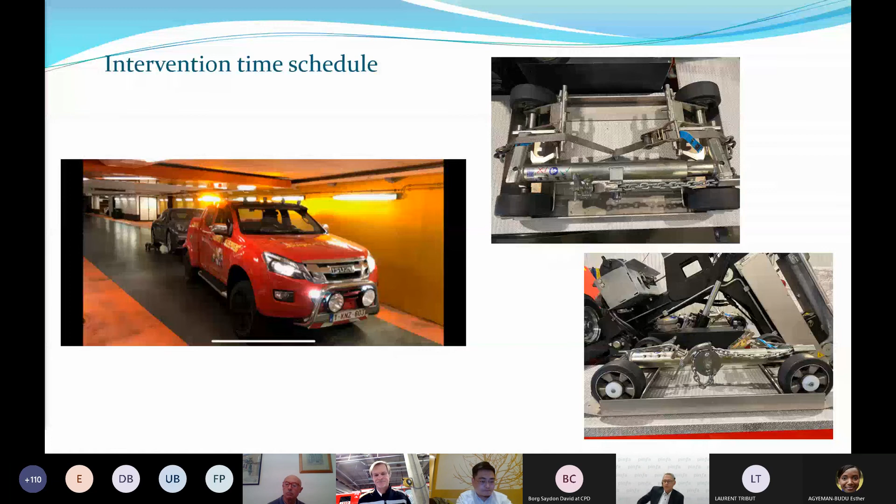And then, of course, we will wash the car. We will put the car in a water containment to stop the process, and we will leave it there until the process has stopped. Next slide.

And then, of course, we have to remove the contained water with toxic substances. So we have to contact a specialized firm to remove all the contaminated water. Next slide. I have a big question.

How will we do that if there is a bus that caught fire? A bus company asked me a few weeks ago, we will drive electric buses here, but we have two batteries on top, each one ton. So what in case of a fire? I said, we have no water containment where we can put that bus in. So this is a big problem.

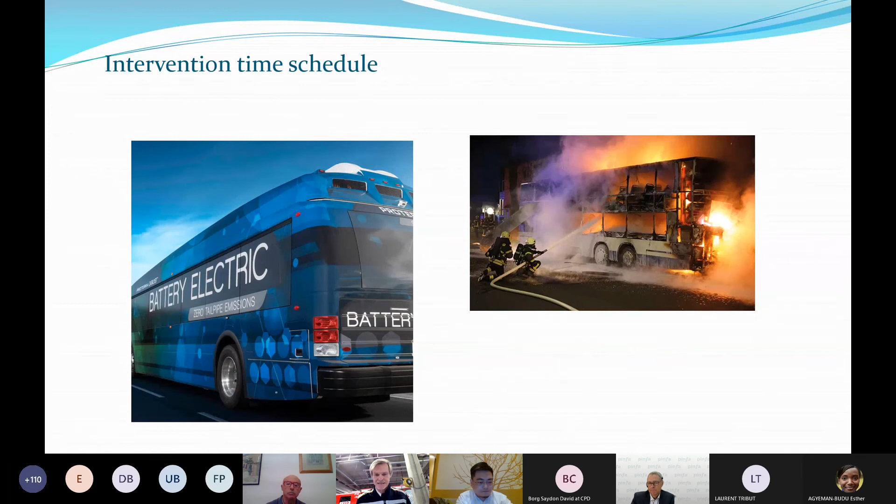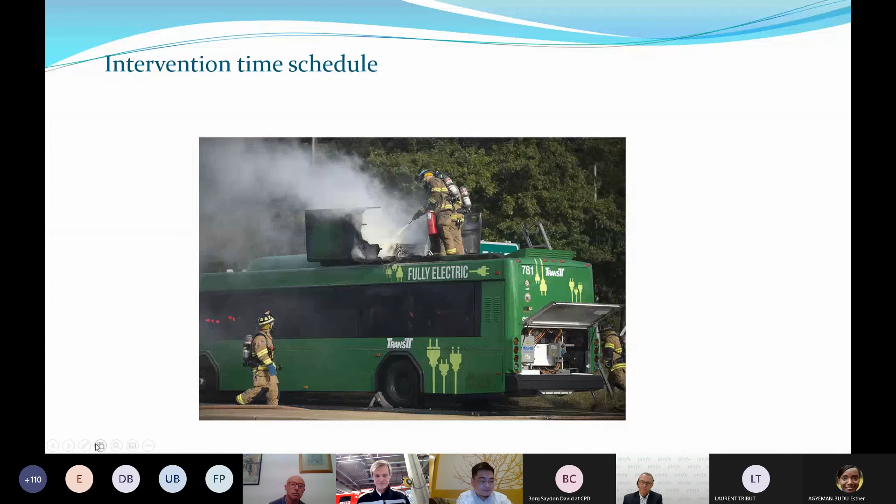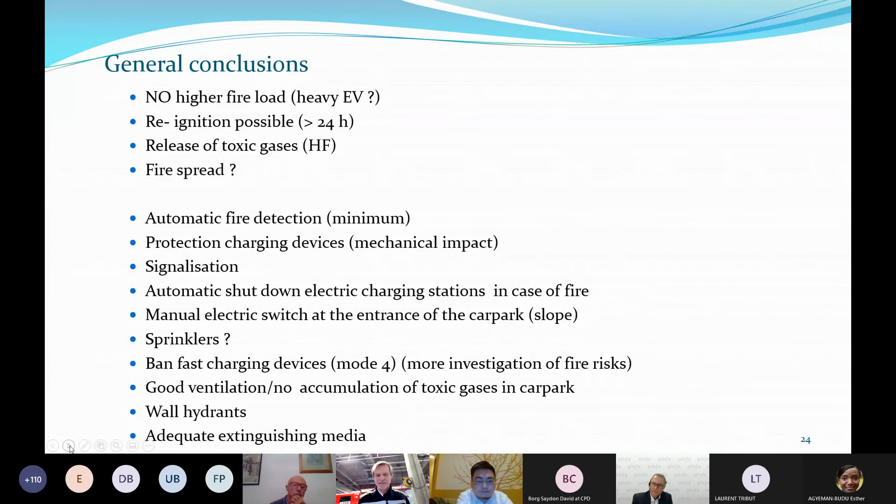And then I put some measures on the paper, like at least a minimum fire detection, the protection of the fast charging devices against mechanical impact, an automatic shutdown of the electric charging stations in case of fire, a manual electric switch at the entrance, sprinklers - is it necessary or not? I don't know at this moment. And of course, adequate extinguishing media. Next slide.